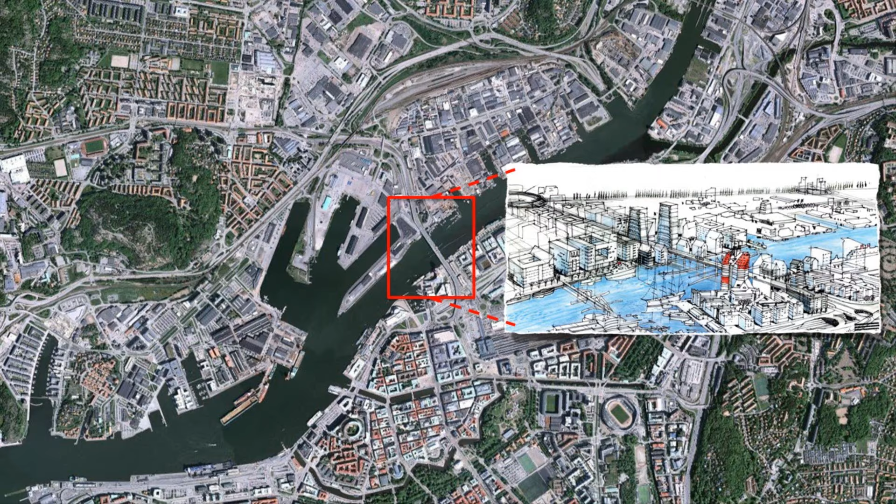CityEngine proved to be a great tool to meet these challenges. Because of the immense impact and 3D nature of inner city planning projects, we felt that we needed a way to communicate these changes with stakeholders, decision makers, and the public.

Another main factor in our decision to pursue a new 3D model for the city was its unifying effect, the ability to coordinate city planning projects between departments internally. We also have many different softwares, both CAD and GIS, being used in planning processes across the city. CityEngine really gave us a platform for bringing this work together, supporting all of these different formats.

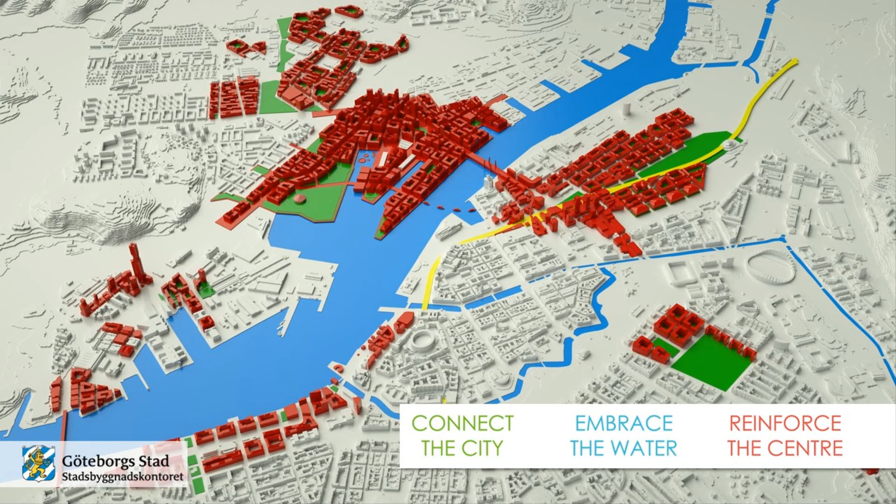Our main goal was first to build an existing conditions model of Gothenburg, then use CityEngine's procedural modeling to quickly model all future plans for the city, starting with the Free Harbor project, in order to review the entire unified vision. Finally, we wanted to share these models internally with different stakeholders and externally to help with public engagement.

Early in its adoption here, we experimented using the Free Harbor project as a pilot. I'll quickly explain our workflow using CityEngine's procedural modeling. We first import our GIS street data, and CityEngine enables modeling networks and lots with parametric rules. These rules have parameters, or commands, that control what type of model is generated.

With rules on the streets and on the lots, a procedural 3D city model is generated, with only your imagination setting the limits of what's actually possible to generate. The rules also enable us to create different real-time reports with vital information during the planning process, like FAR, floor area ratio, or the predicted number of occupants.

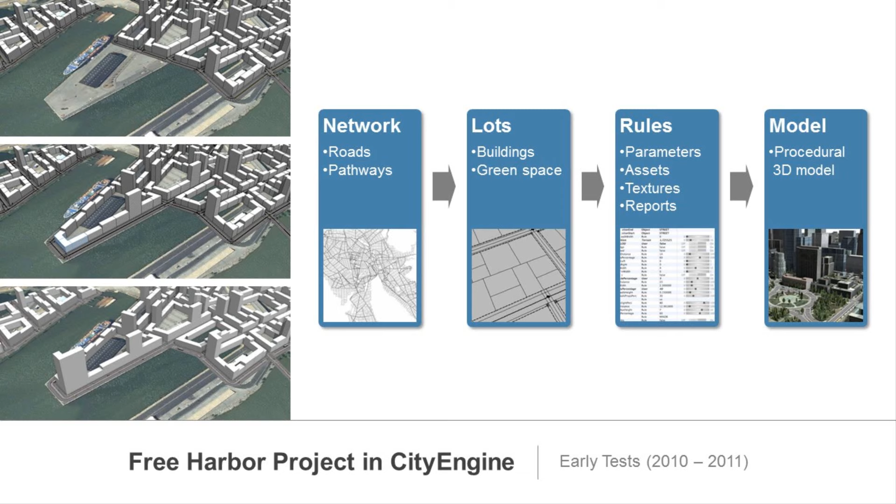First, because of the direct compatibility with GIS, we're able to import all of the networks that make up the roads and pathways in Gothenburg. These are typically represented as a single line in GIS, with some additional information telling us how wide it is, etc. CityEngine actually models out the street and the sidewalks from that single network line.

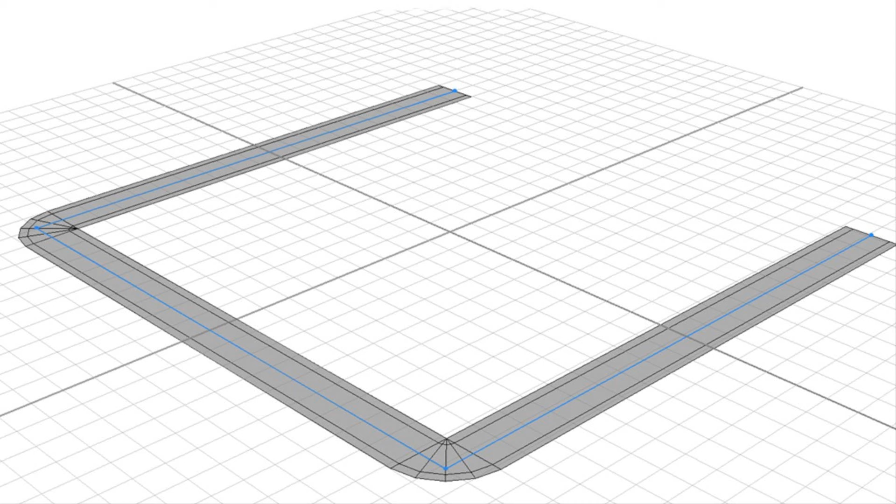We then applied one of the example street rules to these shapes. This extruded sidewalks, scattered objects like street lights, and also textured the street.

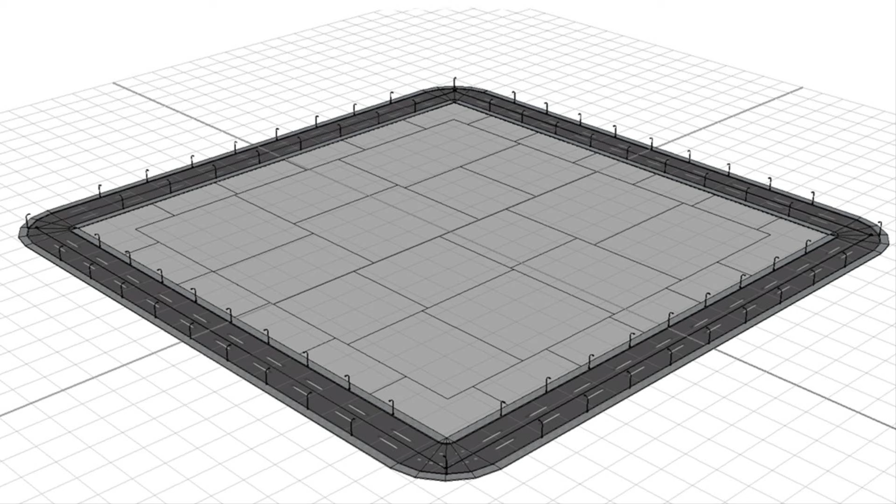A nice feature inside CityEngine is the ability to create blocks when these street networks are completely encircled. We're then able to subdivide these blocks and create lots. This subdivision type, with buildings next to the streets and inner yards, is very common in Gothenburg. After this, we can apply rules to the subdivided lots to generate buildings, like you see here.

With the resulting generated form, it was then important to further refine the parametric rules. Design questions arose, like which attributes would we, the city planners and architects, want to be able to alter, and what type of reporting most matters to planners while modeling building masses?

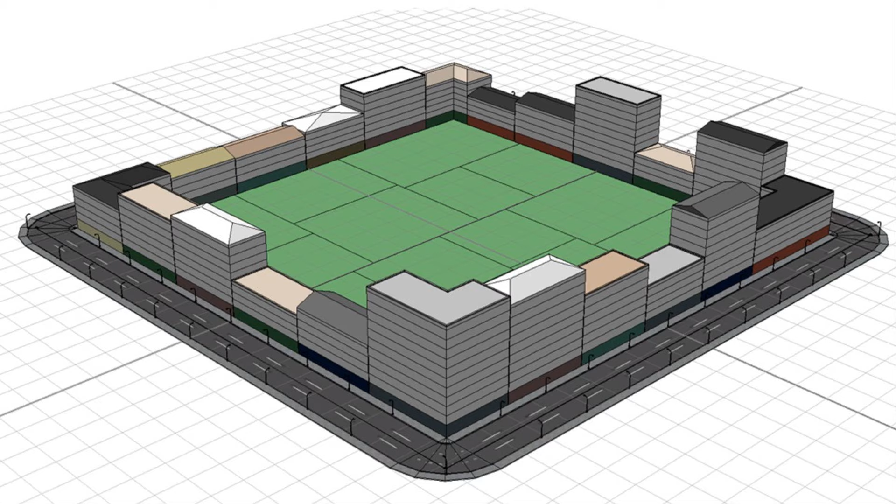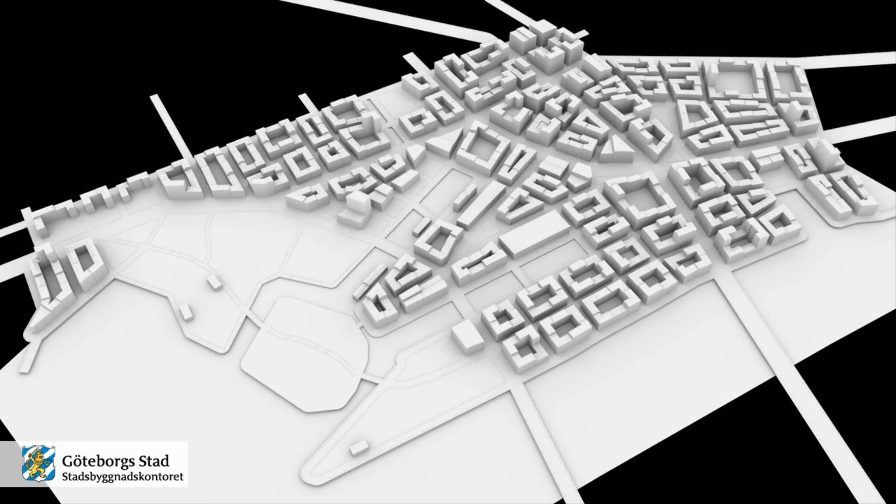This slide shows one of our first visualizations from spring of 2013, showing the volume and scale of the Free Harbor site at, say, the year 2035.

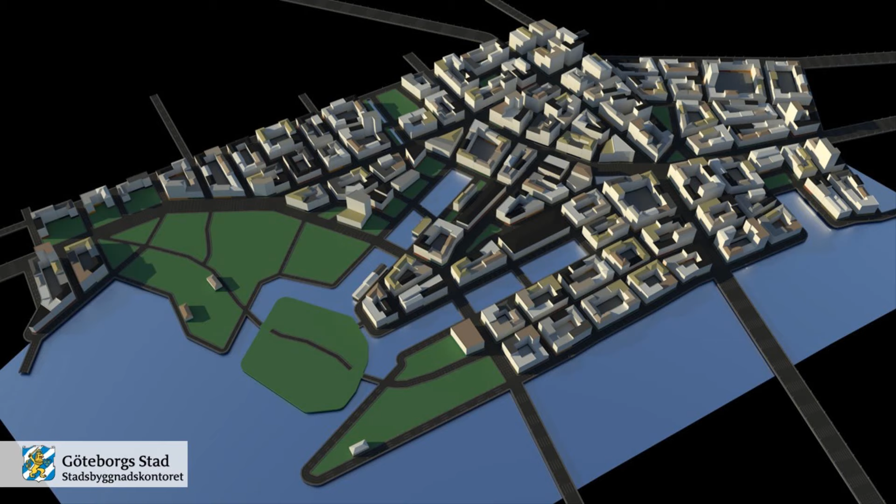With it, we better understand the relationship between the hierarchy of transportation networks and the land use across the project sites. We further compared view sheds and waterfront interface, both very important components in urban design.

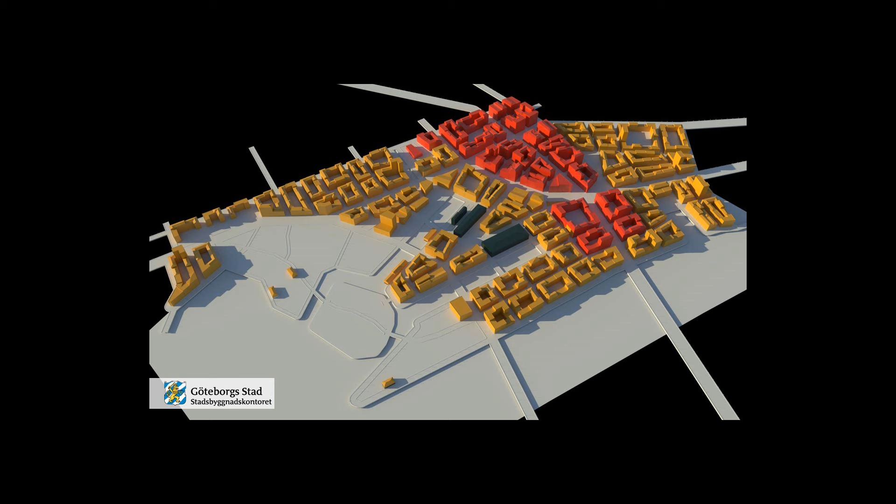For me, the value of this interactive 3D map became clear during our first meetings with the city architects. The 3D model gave us a shared view and understanding of the different project spaces and their context within the larger plan for the city.

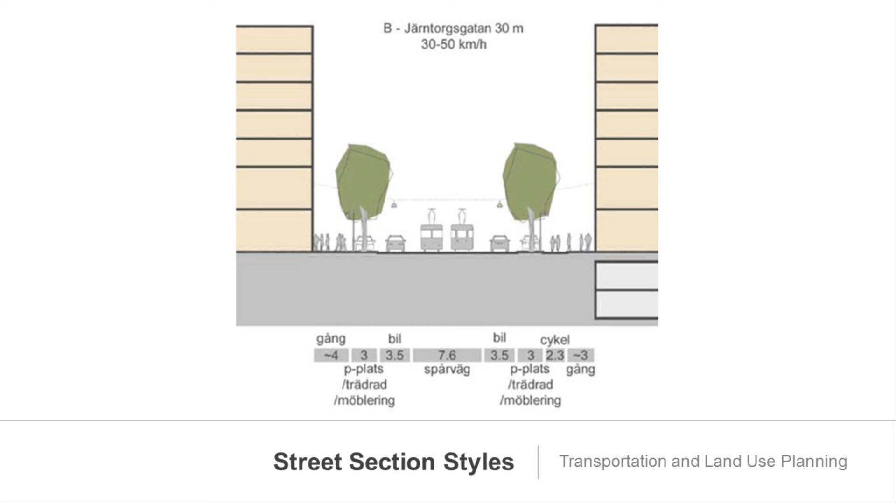The 3D parametric modeling became a powerful tool, much as the 2D section drawing was used traditionally, giving us an understanding of the relationship between the urban corridors and the built land use surrounding. On this slide, you see one of the many street section styles we used in the beginning of the Free Harbor project.

With a project zoomed to each project site, we could virtually place ourselves in the environment that we were depicting in these 2D sections. This is a really powerful feature and often used to create images and animations for our city planners and architects.

A common zoning constraint is floor area ratio, meaning that the mass of a structure can be no more than the mass of a one-story structure covering the entire parcel. Parking and aesthetic requirements limit this type of building, so alternative designs must be evaluated against FAR ratio constraints. Just a simple CGA rule outputs an FAR score for instant feedback on a design's viability.

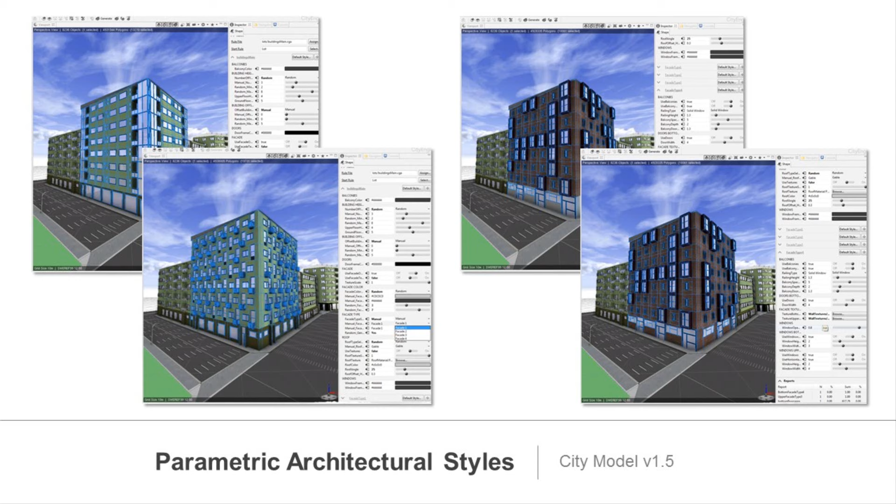Some of the designs you see here are based on recently built lots here in Gothenburg. Our CityEngine model has many different levels of detail, also known as LOD. And this one was to become our highest LOD.

This detail is not to replace the necessity of architects, of course. This type of facade modeling merely allows for more flexible work with the building interface. For example, the number of balconies. Are the balconies recessed or extruded? How do these smaller details affect the appearance within the larger context of the site?

It also shows the scale and the number of generated floors from afar in a more pleasing way. And no other tool really allowed us to experiment at this level of detail at such a large scale, at the city scale before.

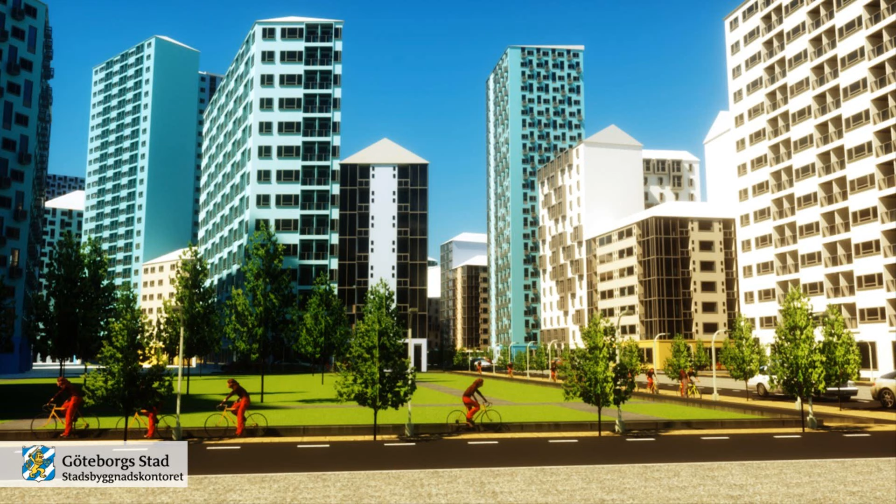These early models convey in a clear and understandable way how the city is looking to grow, both in density and in form. And as we continue to use this technology in our planning practice, we are looking for new ways to leverage CGA scripting to support the evolving planning process.

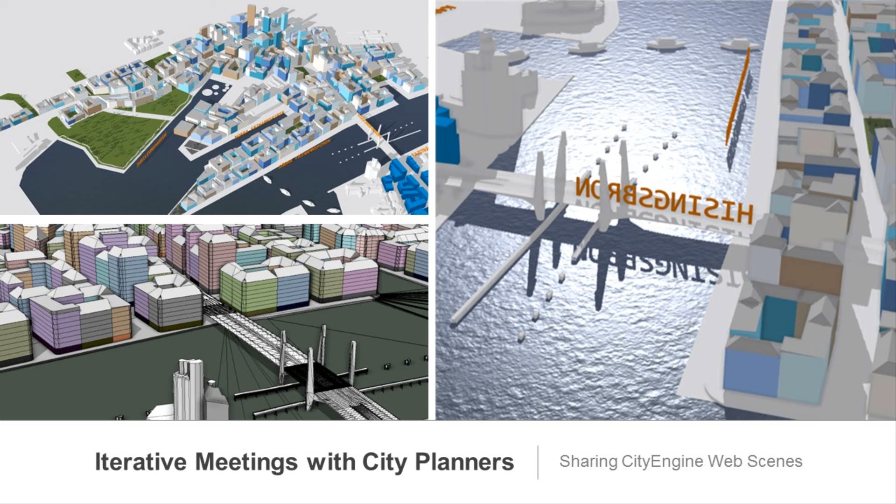Our group now has iterative weekly meetings with the city architects and planners. Traditionally, when a planner or developer looks to build in the city, they create a static rendering or sometimes a video or an animation. We were able to provide them not only the 3D content from our internal charrette, but also an updated web scene to take away.

The CityEngine web scene is an online resource using WebGL, where users can explore the city model in real time in a web browser. They use it for planning, meetings, and for creating pictures for presentations.

With that being said, we could provide them the entire 3D model. But the procedural modeling is very efficient in generating 3D environments to the point that it would and will overload most other 3D softwares.

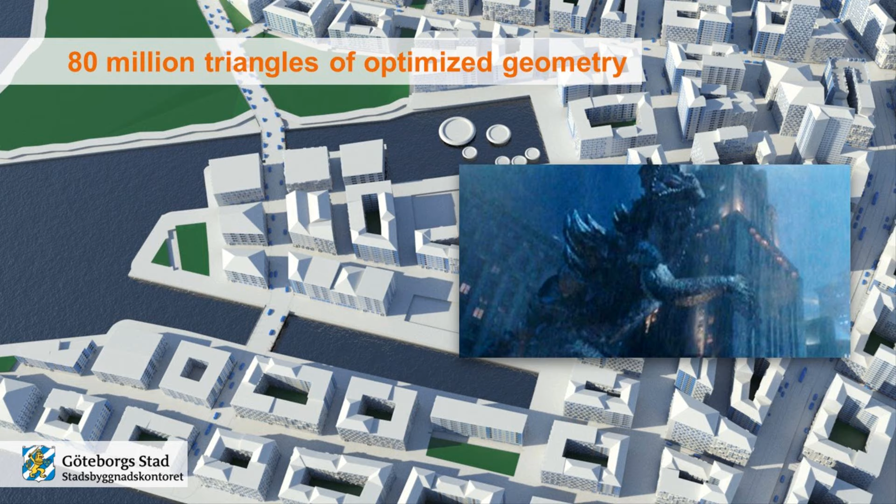Just this Free Harbor site alone, and the model you see here, was 80 million triangles of optimized geometry. Just to give you a sense of scale and size, the 3D model of the Godzilla movie back in the late 90s, which still is my favorite reference, was about 1 million polygons. This means that the Free Harbor site would be about 80 Godzillas.

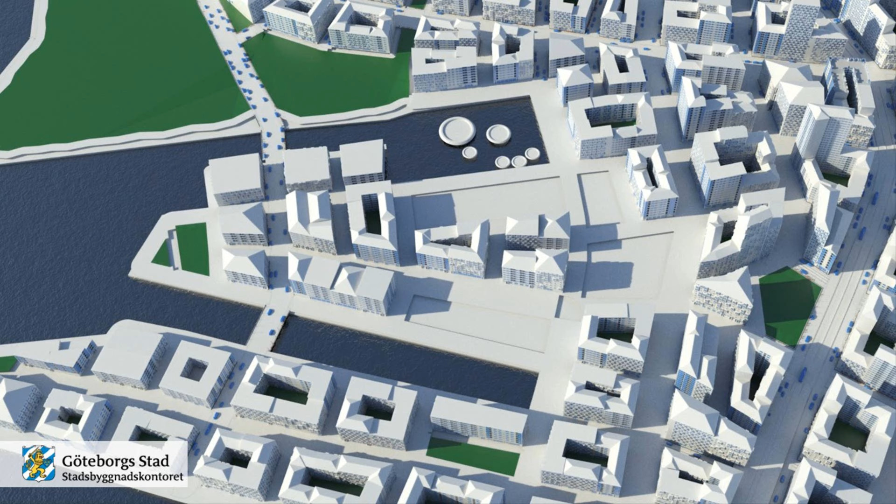We essentially had to split up the entire high-res model even further into smaller quadrants for the city planners and architects to take with them. These models would, however, be old by next week, until the next meeting. But these parametric rules allowed us to keep the entire city model up to date in real time, and to visualize this heavy scene we used Maya and the Arnold renderer.

Our next goal, which was a big one, was to create a 3D printed physical model of Gothenburg using this CityEngine project. It was initially built for the MIPIM real estate show in Cannes, France in 2014, but this model has visited multiple expos since then, and it just came back from Munich, Germany. It actually travels more than I do.

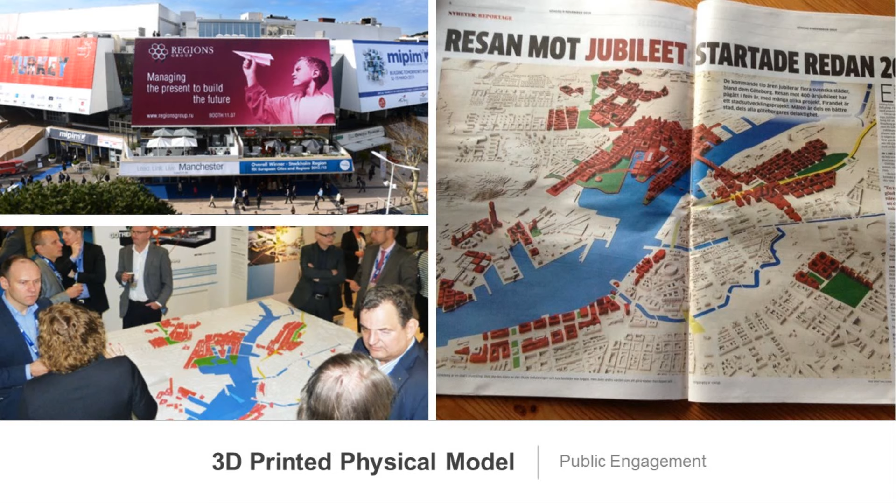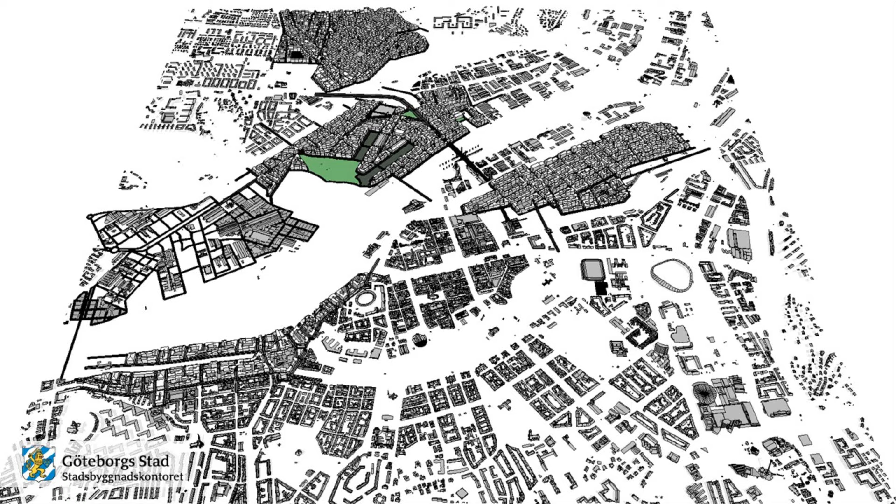Creating this physical model was a huge undertaking. It meant importing all of our roof data for this area of Gothenburg and generating three-dimensional buildings, and also generating a large and heavy terrace-like ground model suitable for 3D printing. These enormous tasks were given to and delivered by my colleague, Tobias Wikström.

To make a long story short, after a few months of hard work, the 2x2 meter model was finally complete. The red and green parts here were created with CityEngine, and the larger white areas were generated from our GIS data of Gothenburg.

It was built modular for transport purposes, and here's a work in progress shot before all the 64 tiles were generated and delivered. The heaviest tile weighed around 3 kilograms or 6 pounds. As we produce our second, third, and fourth edition, next time perhaps we will print the terrain separate to the buildings. This would allow us to better switch out new updates to the plan.

Another common output for our CityEngine model is the Urban Explorer table, where city planners and architects often gather and have meetings and discuss plans and concepts. It's an interactive real-time visualization system, and perhaps the most used end product for our CityEngine model.

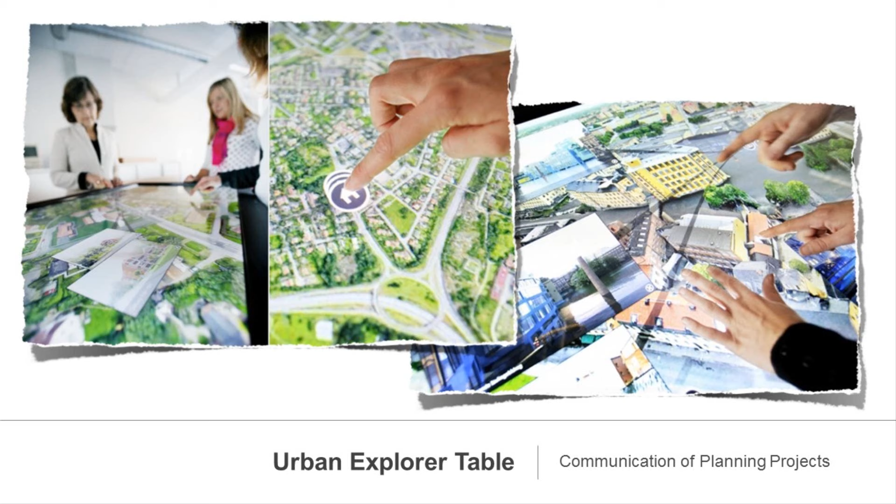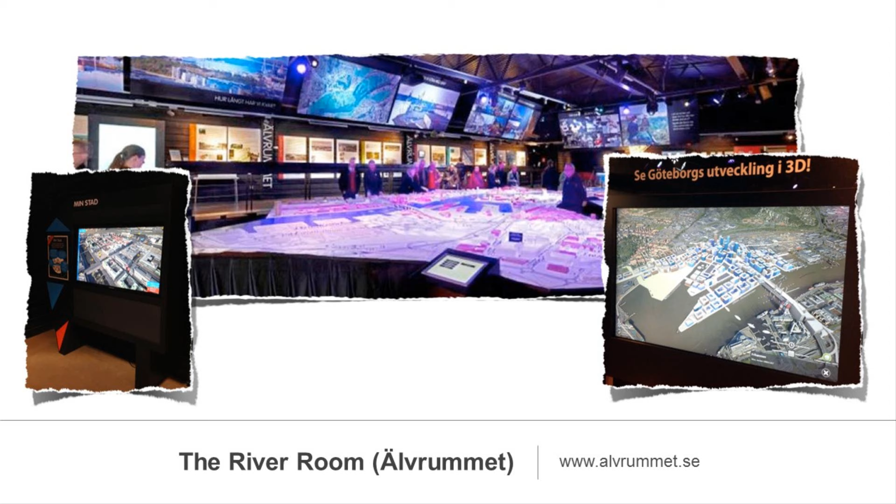Our main place for public outreach in Gothenburg is the River Room, or Älvrummet in Swedish. Here we have a 12-meter wooden model of the city showing new projects, and also other interactive touchscreen products featuring our CityEngine models.

We refer to our in-house production pipeline as virtual city planning. In summary, this enables our department to visualize and present city projects in an easy way, present complicated projects in a non-complicated way, create decision support material for politicians, easily test planning concepts in real time during meetings, quickly identify problems and stop impossible scenarios, and create models which have multiple end products.

We also use this pipeline when planning the big Gothenburg 400-year anniversary in 2021, where our CityEngine model will be used for multiple products.

In closing, what we found is that virtual city planning leads to a common view of the projects, shorter, more efficient meetings, better communication and coordination between departments, and that it's easier and more intuitive to communicate city planning to the public.

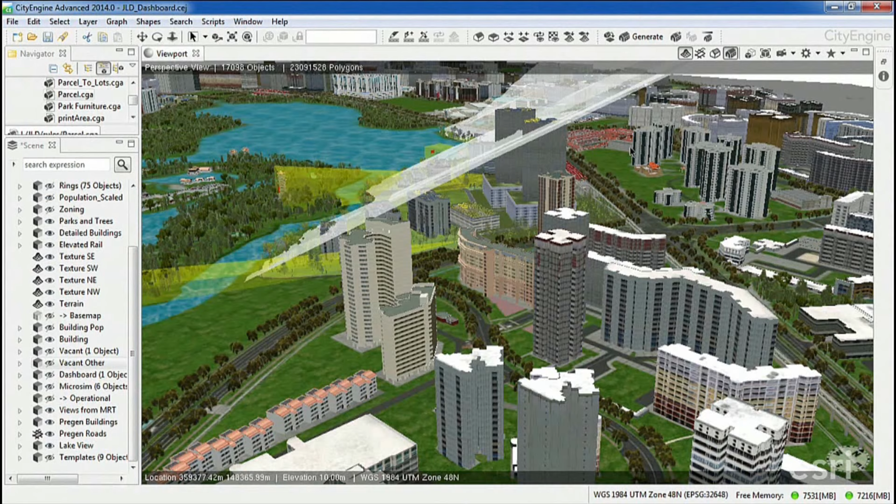They recognize the future comprehensive plan will be data hungry. So how do we start to visualize this data? Furthermore, how do we start to work with this data, with environmental and economic constraints? You can see here that the URA was able to implement CityEngine rule-driven modeling within their planned constraints, like this lakeside view shed. The buildings are able to adapt on the fly, enabling a flexible 3D design environment.

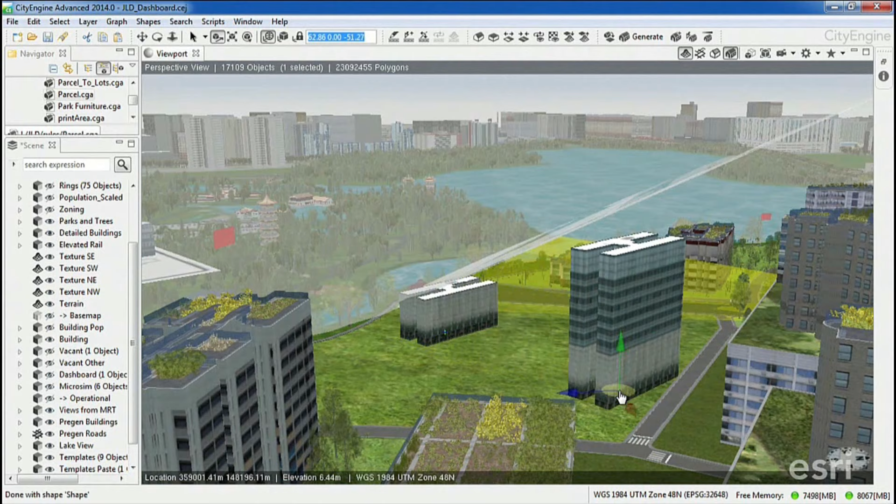Another great example comes to us from Rochester, New York. The city's goal was to achieve a shared and common 3D view of their city to support their planning process. This is a great example using CityEngine for comprehensive planning and to support the development review process. The city worked closely with Esri's partner Bergmann Associates to implement their 3D vision.

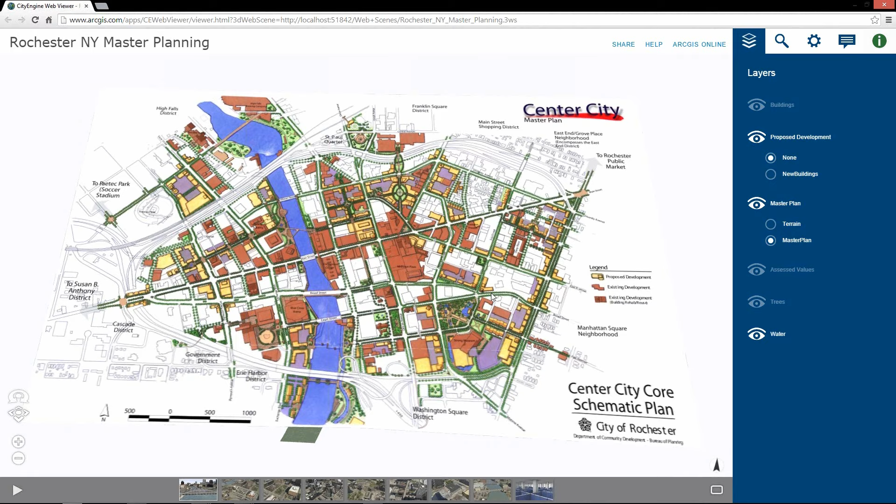Rather than show you a PowerPoint slide, I'll open up one of their web scenes. This is the web interface that Arvid was referring to, which the City of Gothenburg is also using. The City of Rochester is overlaying their master plan design, their 2D master plan, on the terrain of the city. Let's dip in here, and I'll turn on the 3D content.

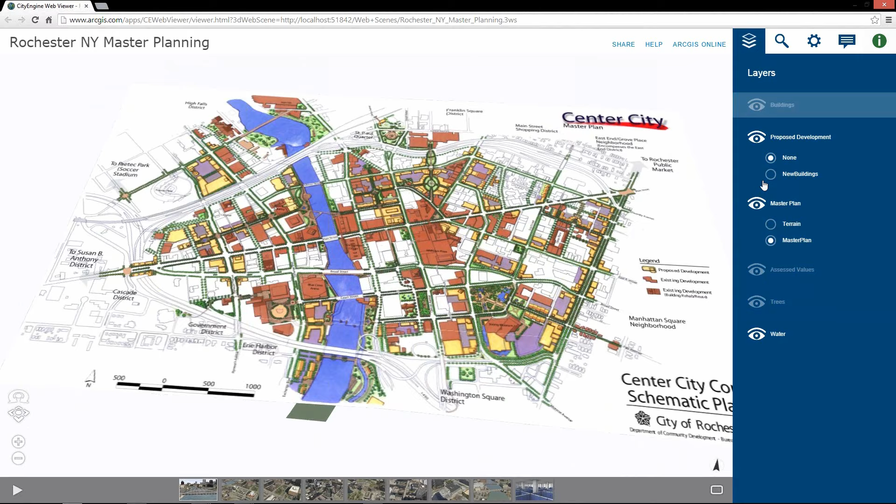This gives a very effective way of projecting the 3D model on the wall without the need for a high-powered desktop at planning and stakeholder meetings. Very rapidly, you could bring someone to a specific location within the city and really have a conversation about that location. As I mentioned, they overlaid the master plan, which represents the future growth for the City of Rochester.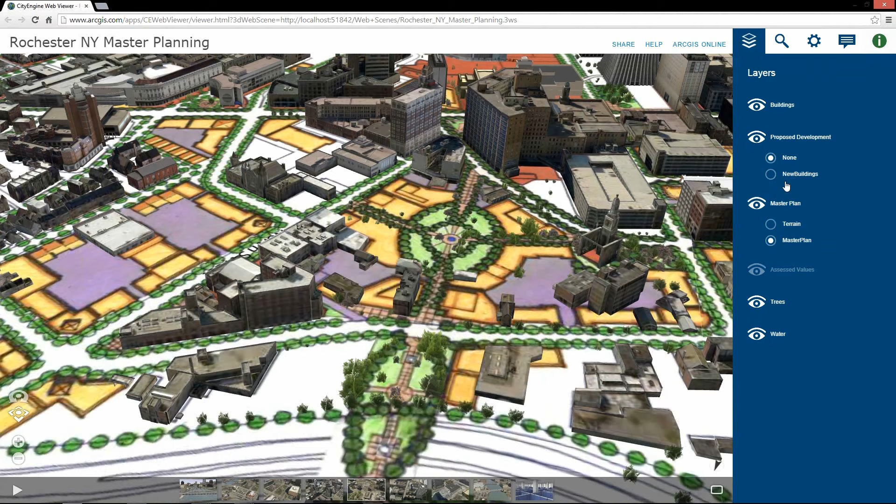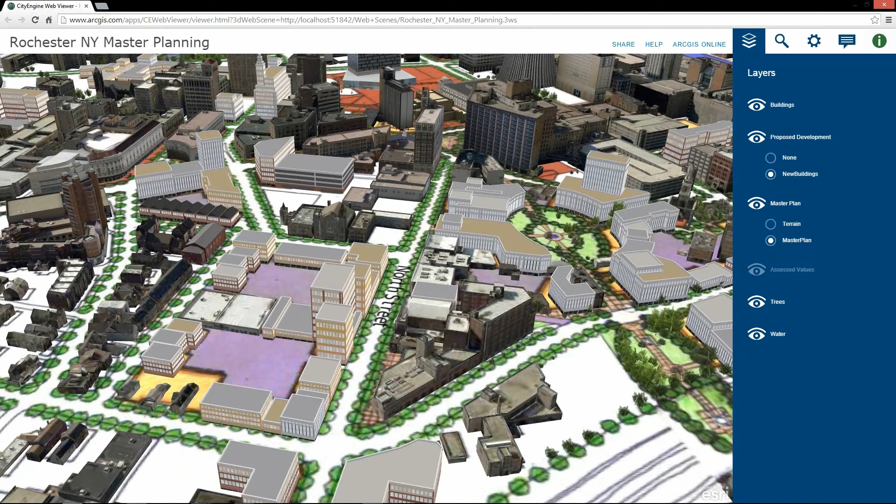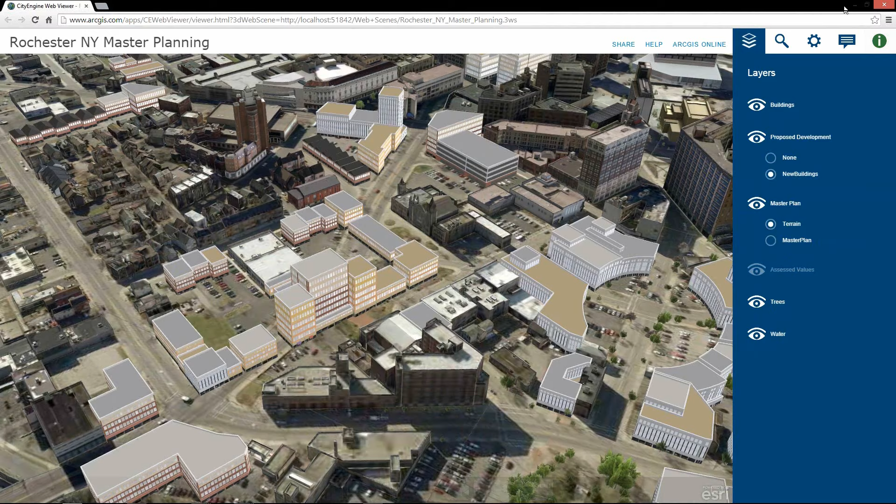Using CityEngine rules, they were able to use the footprints and generate buildings based on their form-based code within the city, looking at height and the different glass interfaces of the buildings. You can also do comparisons. All these layers can be set up within the CityEngine project ahead of time, and you can have a swipe between the before and after. A very powerful tool — it really liberates 3D modeling from the desktop computer like never before.

Moving now over to the California coast, nearby me, we can find a great example coming from nearby San Francisco. The Bay Area Rapid Transit, or BART, was looking for a way to communicate transit-oriented development plans both internally and out to the public. BART also recognized the efficiency and impact that can be achieved by communicating their plans in 3D.

BART is working with Esri Professional Services to define their 3D modeling process using the Richmond station as a prototype. This project laid the groundwork for how BART is going to move forward with modeling all 44 of their stations in 3D to better communicate the development plans for the areas surrounding each station.

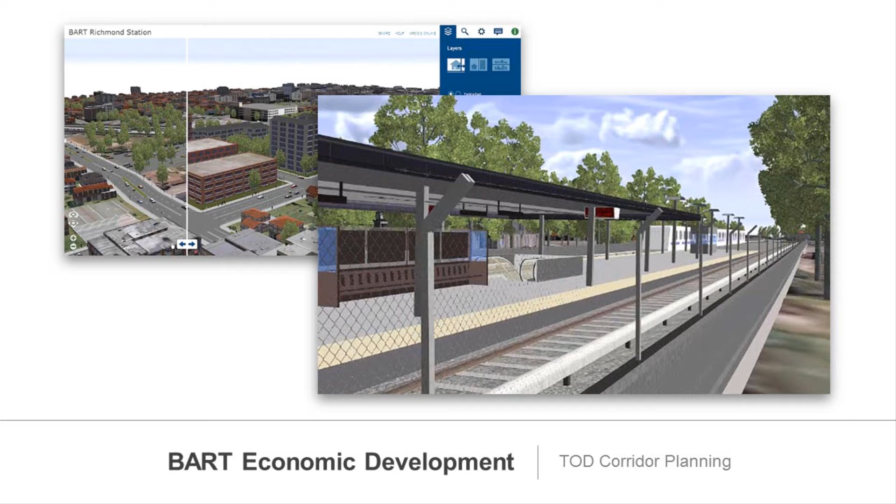Our second speaker today is coming to us from Garsdale Design Limited, located in the UK. Matt is an architect by training, and before Garsdale Design, he worked for the Esri R&D Center in Zurich, where CityEngine is developed and got its start. Over to you, Matt.

Thanks, Brooks. I hope everybody can hear me. Hi, I'm Matt Bueller. I'm currently the head of 3D technology here at the UK-based Garsdale Design. My background is in architecture, but since university I've been getting more and more specialized in 3D graphics and visualization. Having worked in the CityEngine development team in Zurich made me one of the very few CityEngine specialists worldwide. My specialty is high-end graphics and digital sets, and I hope we here at Garsdale Design will soon also provide services for the VFX industry.

Today I'm giving a brief overview of the most interesting key points of the Favela project I did in CityEngine with my friend Cyril as a hobby project. In a minute we'll have a look at a few of the images we produced, and if you haven't seen the video yet, just search YouTube for the keywords CityEngine and Favela.

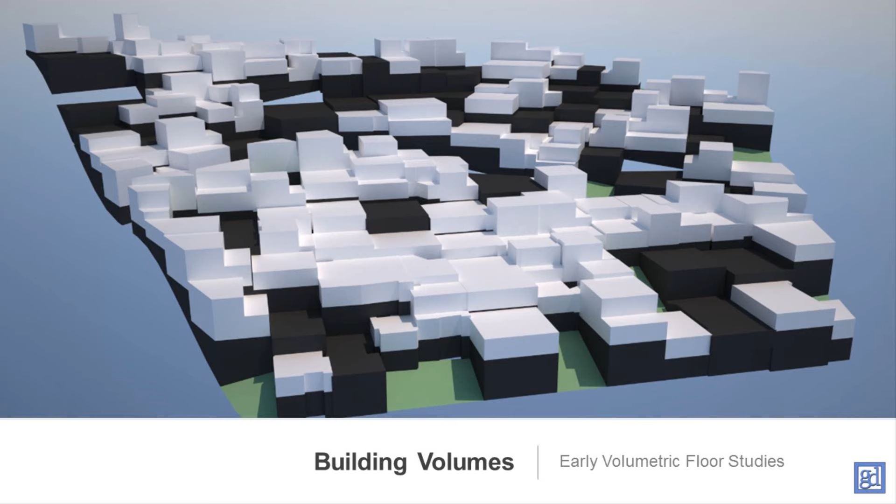So where did I start? Of course, with tests about floors and mass distribution in CityEngine.

As we've seen in Arvid's presentation, CityEngine is a procedural modeling application. The definition of how a building is modeled is done in CGA, CityEngine's proprietary scripting language. Some of the first tests I did was to find the best approach to model building volumes that look feasible for the given scenario. This image shows a very early volumetric study.

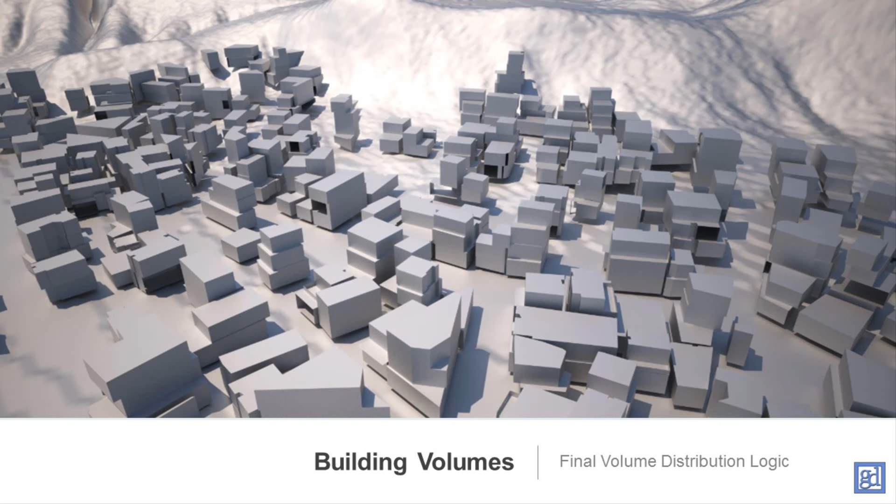White volumes have a flat bottom side, while black ones have a sloped bottom side. This picture shows some of the final building volumes. As you can notice, the building volumes are very irregular, with dents and shifting relative to each other. There's even some missing walls, exactly as in a real favela.

Next topic, facades. We collected 60 facade images and processed them each in CityEngine's Facade Wizard. The result was a structured library of facade rules that can adapt to all possible given facade geometries, given by the mass model we've just seen before. I manually post-processed each rule to minimize texture repetition and further marked specific polygons as either opaque wall or window, to be able to distribute more objects like pipes and ACs on the facades.

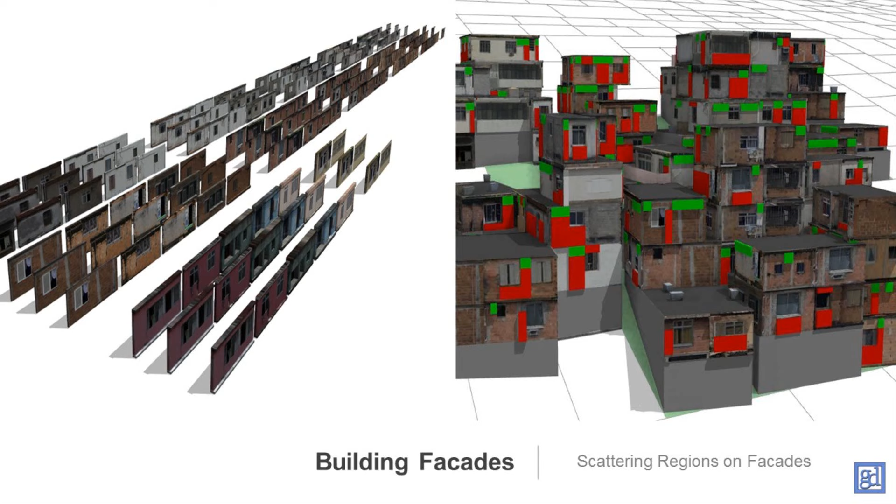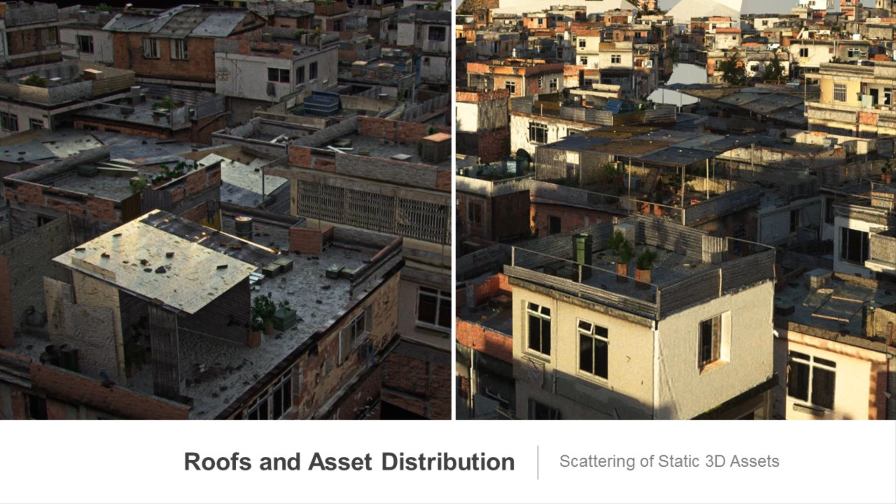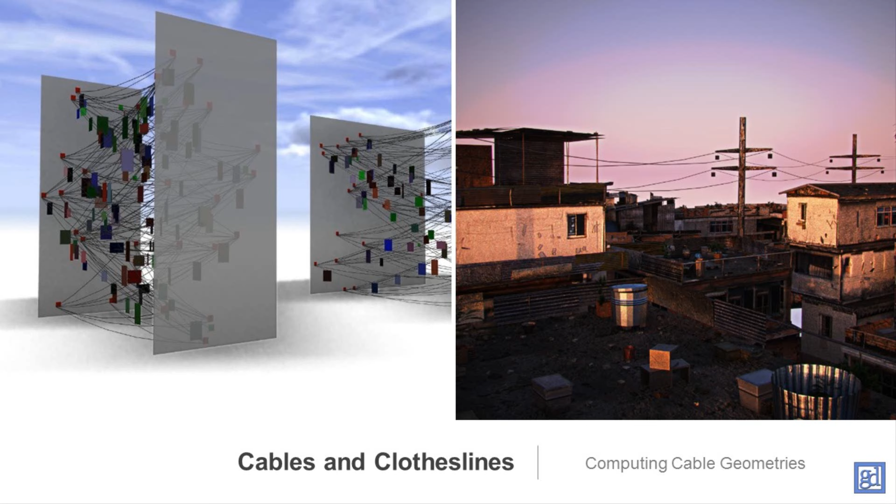Since no favela is convincing without cables or clotheslines, but cables can sadly not really be created procedurally in CGA, I created a Python script that does this for me. Using CityEngine's reporting functionality, I can collect all potential cable connection points, evaluate them, compute the catenary curves, and finally create the cable geometries. The result is quite convincing, where cables go from building to building and connect to the next suitable power line pole.

Last but not least, I want to quickly explain the pipeline I designed to go from the model in CityEngine, with a simplified material representation to save resources, to start the render in final quality in Maya in less than 1 minute, at least for small bits of the favela. This was needed so we could have fast design iterations with full artistic control over the project, without having to worry about the quality or the amount of detail in the final model.

Developing this pipeline took me about two-thirds of my whole project time, but it also taught me the most. So this is the chart of the pipeline, let's quickly explain it.

Working in CityEngine and wanting to start renderings in Maxwell Render from within Maya, I had to bring over two types of data from CityEngine: the model geometry and the reported point locations for each of the plant species. The file format I settled on to export the models was OBJ, since it proved to be the most flexible. It's a text-based format which allowed me to parse the whole file with code and restructure the data.

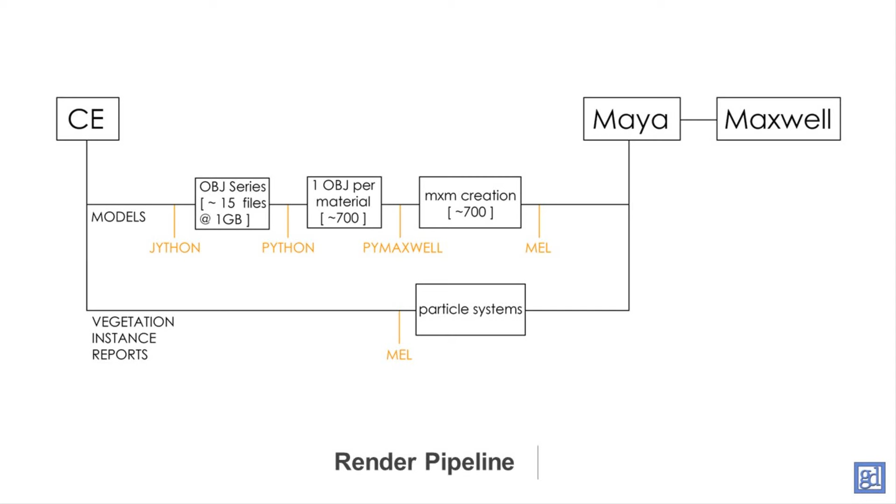To bring over the vegetation instancing data, I used CityEngine's console to directly print out Mel code, which, when copy and pasted and run in Maya, created a separate particle system for each plant species and filled them with the appropriate particle positions.

So this was it for the Favela project, and just to have a quick overview of what we do here at Garsdale Design Limited: we have an older, traditional branch of business which includes architectural, planning, urban design and heritage services.

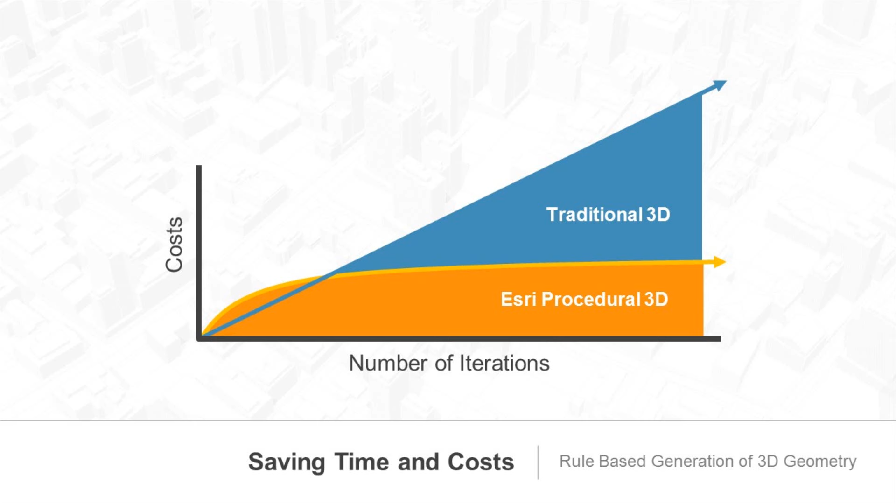So the big question is, is efficiency critical to your 3D pipeline? When you compare Esri's procedural 3D to traditional modeling in 3ds or SketchUp, you can see that if many iterations are needed, it's much more efficient to use a rule-based parametric modeling software, particularly with large models requiring high detail. With traditional 3D modeling, it's pretty much equal output to equal input, and ultimately it's about saving costs. To do some of the work we've seen here today, you might need a fairly large team working in 3ds or SketchUp to accomplish the same tasks.

In summary, procedural modeling can be explained in 3 steps. First, bring in your geometry, either GIS or CAD. When using GIS, we can take full advantage of the shape data or attributes to further automate the modeling. Then you apply a rule. This is the combination of existing 3D models, like all of the AC units and pipes that Matt was showing, and textures, together with a simple scripted framework called CGA, which stands for Computer-Generated Architecture. These resulting generated models can get iteratively more complex, from a basic form to something that better resembles the Parthenon in complexity.

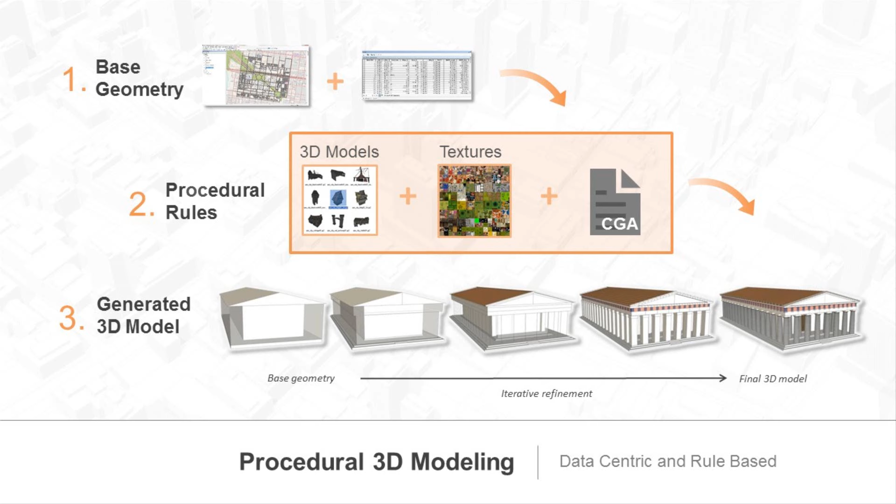These rules make it possible and easy to describe an urban environment by using a set of density and performance metrics. These metrics can be used both to describe as well as prescribe different urban interventions. This is really what sets CityEngine apart from other parametric tools like Grasshopper or Houdini.

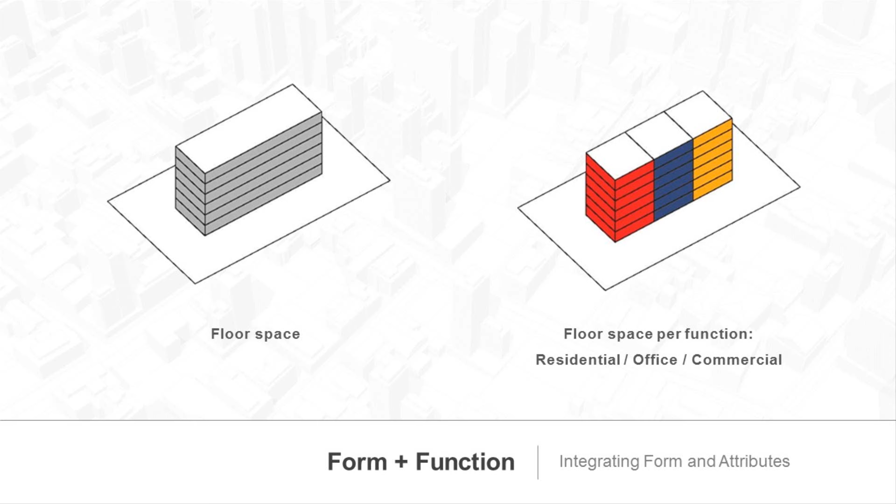CityEngine offers a flexible 3D design environment supporting many industry standard 2D and 3D formats on both import and export. CityEngine also provides multiple views of the same data, so you can take these new buildings and change the 3D view from the rendered look to a theme showing building use by floor, or even rainwater infiltration rates in blue across the entire 3D model. This really enables different actors in the design and planning process to relate different programmatic demands to different spatial solutions.

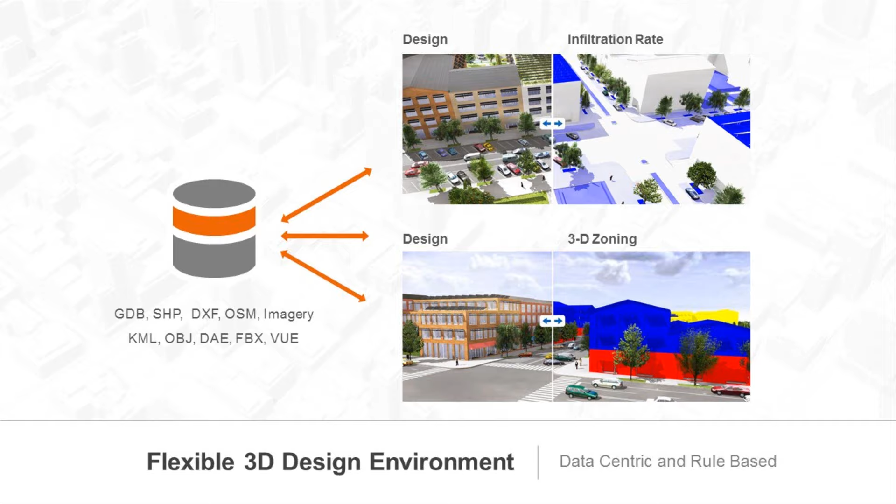So allow me to take you now inside of CityEngine and show you how easy it is to create a design proposal and leverage some of these multiple views.

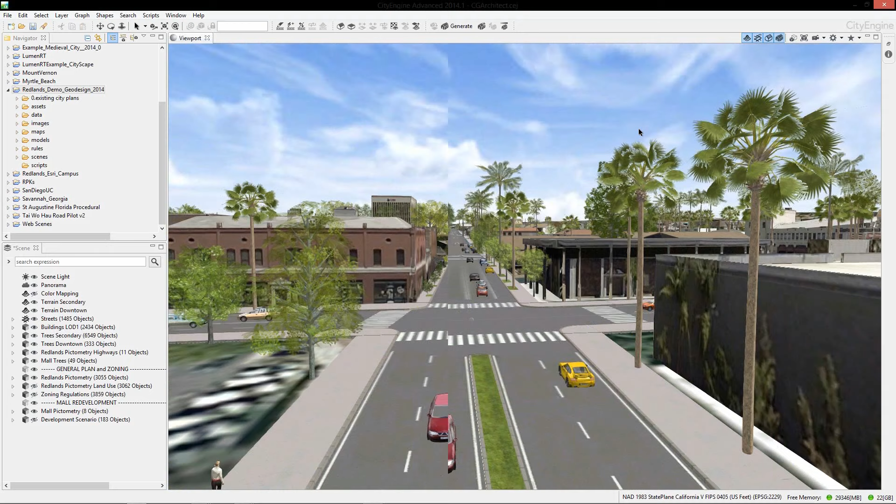So let me go ahead and take you to any town, anywhere. CityEngine allows us to bring in existing city GIS data, like tree points and street networks that you see here, and completely model the city as it exists in 3D. Highly realistic building models can also be brought in from Revit as IFC or OBJ, or from a vendor like Pictometry. We can use the parameters within the rules to make proposals, like how this street might look with bike lanes, etc. In most other applications, you might just have a snapshot, a pretty picture of the model, but we can actually take all kinds of useful information, like zoning and land use regulations, out of 2D and drape them onto the 3D city model.

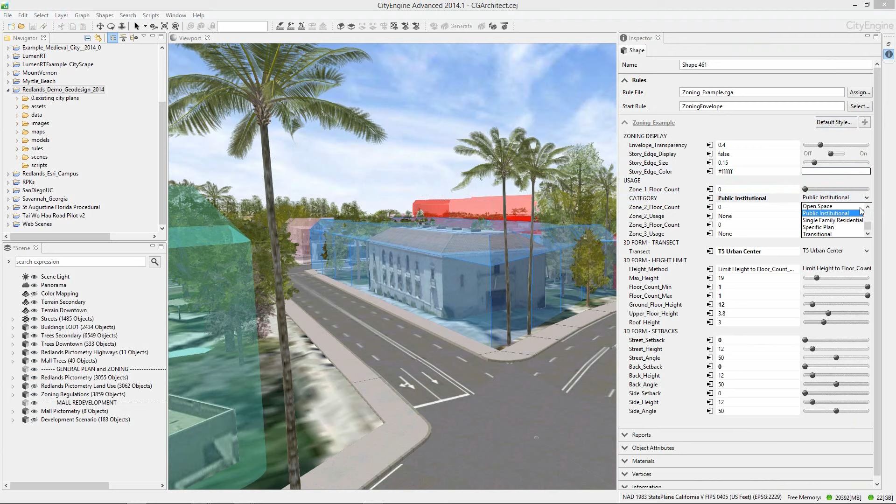Many of you might have seen zoning signs, for instance, that notify the public of a new zone change or a new business. The first question is, what's the current zoning of the property? Plus, what's the zoning around it? We can see this property here is zoned for public institutional use, and we can easily propose a zone change. So we can actually change this to commercial use and even change the maximum floor height, using these procedural rules.

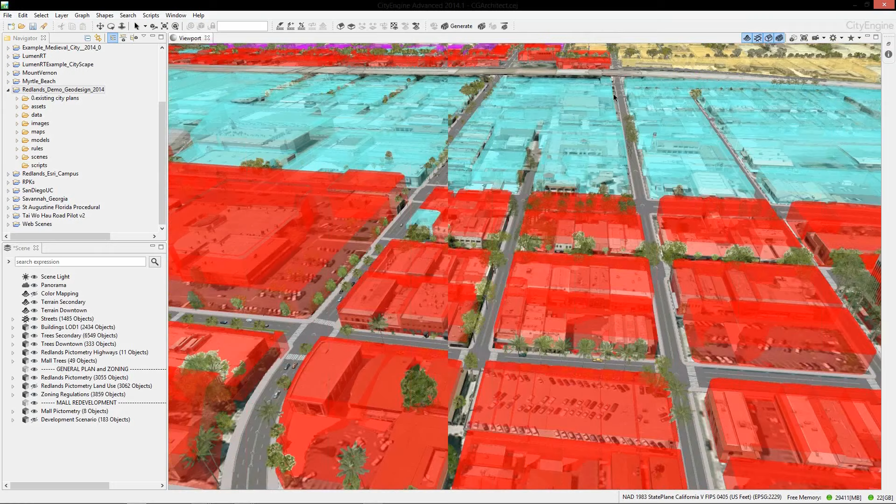And it's really not only about zoning changes. It's also about evaluating the current city's conditions. So if we navigate over here to the downtown bank building, we can see if there's an exception or a violation. This building's height has obviously exceeded its zone height, but knowing it's the tallest building in the city, they probably had an exception.

So let's go ahead and take a look at one particular project here using CityEngine. In this case, we're interested in the redevelopment of this mall, a major economic challenge facing many towns, at least here in America. And we can start to experiment and experience what it could become. So what could this look like? Let's go ahead and redesign it.

The first thing we'll want to do is go ahead and turn off the mall. I've already put it on a separate layer. And using the street creation tools, actually continue Main Street through the site. You can see as I draw a new street, it's actually inheriting the style of the street I drew from. We'll go ahead and add one more street, and we'll go ahead and delete this segment to leave room for a park.

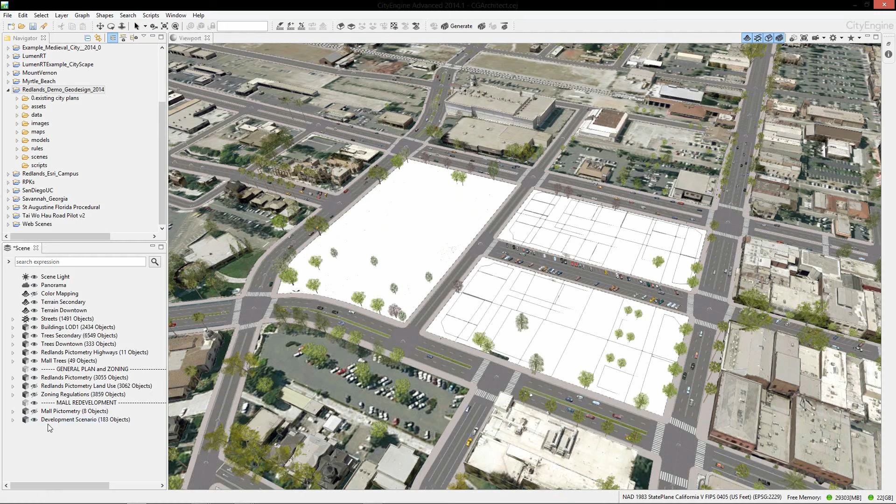We can import CAD or GIS data, or even draw our development plans right here using the sketching tools in CityEngine. Once we bring in that data, we apply a rule and then actually generate the 3D content. So let's go ahead and dip in here.

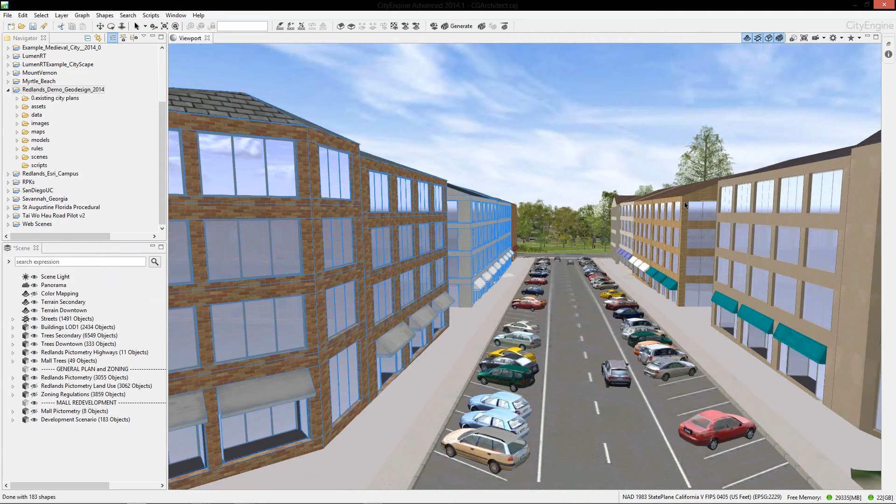We can really gauge the design within the larger context of the city to better experience how it looks and feels here. And like I was saying, CityEngine provides multiple views of the same data. So I can select these buildings and change the 3D view from the rendered look to a theme that shows usage by floor, and I can actually strip away all the textures as well.

So we can further refine our design. Let's add a couple more floors—we'll bump it up to 6 floors. We can actually add these floors, and it's not just in the model.

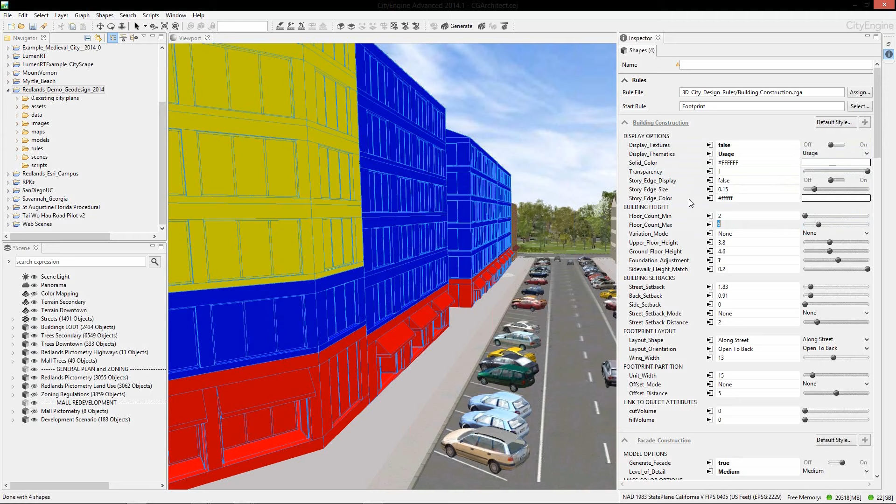We're actually getting real-time reports as well, that Arvid had mentioned. So what the rule is doing is, as we change parameters, it's reporting out different metrics. Some example consumption variables here are based on a baseline and a coefficient based on the land use, but also the FAR, the floor area ratio, or the gross floor area that Arvid was referring to. So it's real-time feedback as you model.

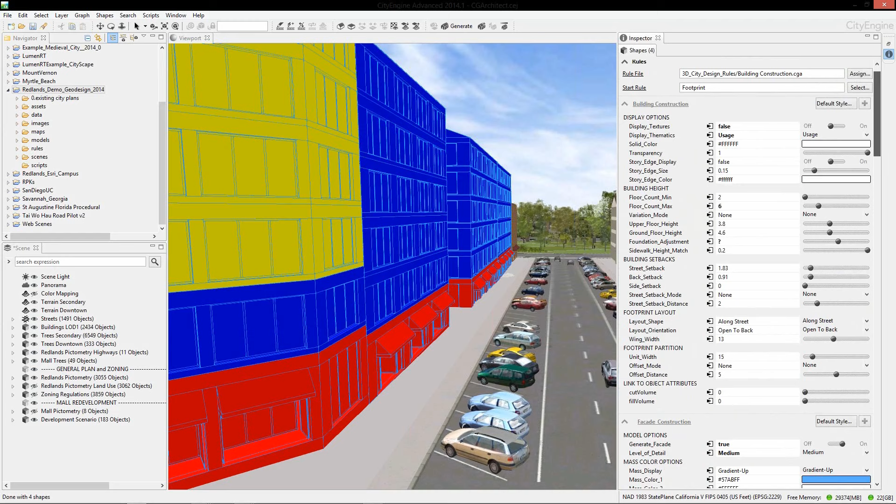So let's go ahead and suggest some tree plantings on this street. It's a little bare. We can actually manipulate the sidewalks here, make them a little bit larger. And using a parameter for the street, we can put the tree percentage at 100%.

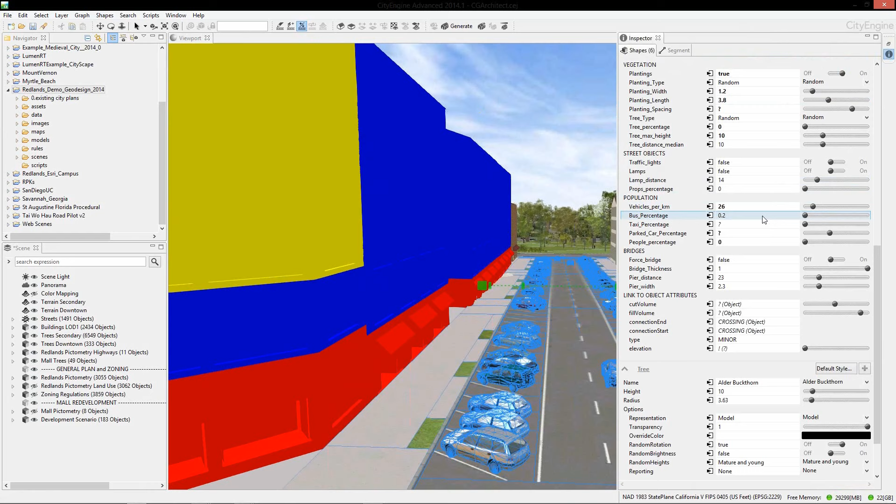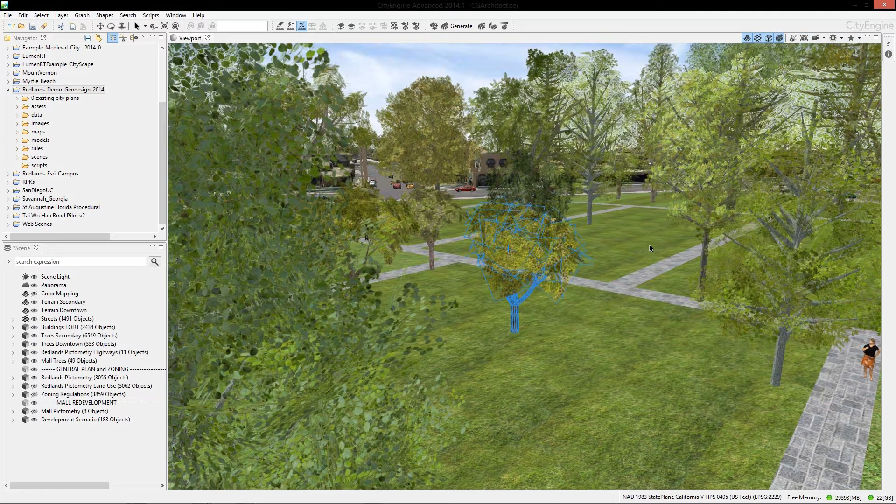And we're using some models for our trees. Let's zoom over here to the park. As we navigate over, you'll notice the very realistic trees that we have here. This park represents most of our tree library, so you get a pretty good idea of how many trees we can work with. These trees came from a partner of ours, e-on software.

We worked with them to create this initial library of genus and species specific plants. These trees can be scattered on polygons, distributed on points like you see here, and they also have 3 different representations.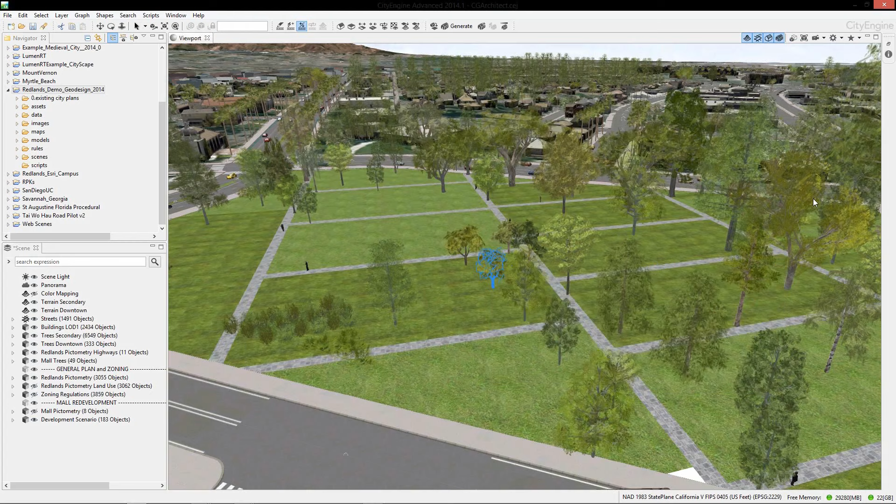So let's select these trees in the park. Much like the buildings, we can switch the view of these trees to something like an analytical view, which in the GIS analysis world is great for communicating the tree canopy and running a shadow analysis on.

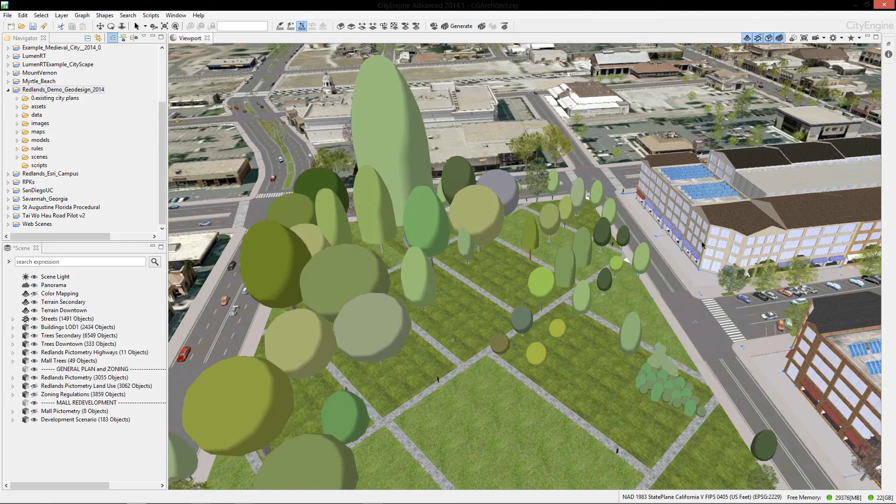So we've talked about some of the major themes around procedural modeling and 3D GIS. I now want to focus on how 3D is integrated into the actual product, supporting the enterprise, connecting multiple communities across this platform.

The Esri platform supports BIM, and there are 3 main methods for integrating this highly detailed data into your project. First, direct import from Revit models into CityEngine via Collada or OBJ. These can be rendered with applied textures through a rule.

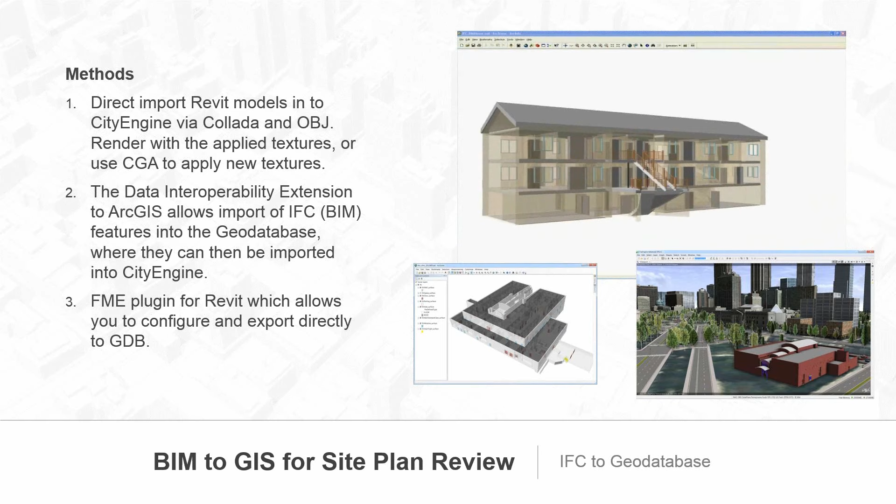Second, the data interoperability extension to ArcGIS, our core GIS platform here at Esri. This allows the import of IFC formats into GeoDatabase, where it can then be imported into CityEngine. And finally, the FME plugin for Revit, which allows you to configure and export only what you need—that's very important—directly to a GeoDatabase on export from Revit.

CityEngine rules can also be shared as a rule package, or RPK, for use within Esri's core ArcGIS software, but also in Unity and Maya with our CityEngine SDK. These RPKs basically package up the 3D models, textures, and script for sharing.

To learn a little bit more about that CityEngine SDK, just visit our GitHub location. The SDK is out there to enable third-party applications and to better integrate within custom pipelines.

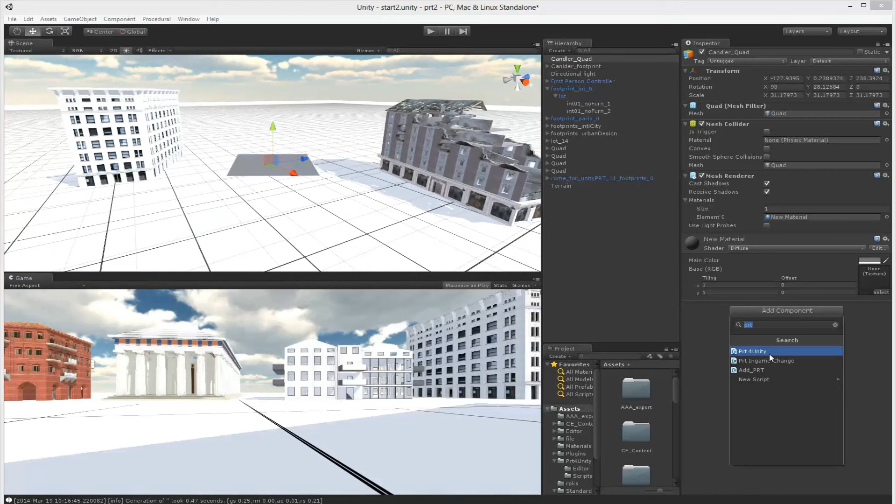So for all of the Unity users out there attending today, there's actually a great example plugin available which allows you to add the plugin as a component. Then you browse for your rule, and you have those attributes that can be changed—those parameters—that can be altered right in Unity, and you hit generate.

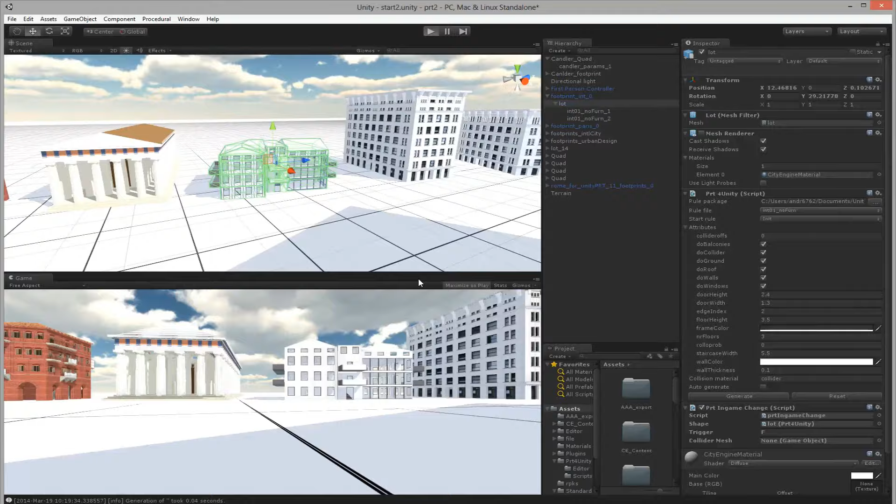We really see this type of close integration as the golden key for 3D workflows in the future. And just imagine designing within real-time environments, really virtually placing yourself on ground level, even navigating inside the building, for instance.

With new advances in technology, there are new advances in expectations. As game engine technology gains adoption and advances in real time allow for faster rendering, we have to keep in mind the technology that is also working hard to increase the polygon count and detail ultimately attainable in 3D. So how is this detail ultimately going to be served?

Allow me a minute to discuss Esri's vision for the future of 3D. With our software, we can effectively make more out of 3D than a simple visual. We've seen powerful work done in CityEngine, giving us fast, powerful tools that support your current workflows and transform the way you model in 3D. We're bringing this same modeling power to Esri's latest addition to the desktop GIS series, ArcGIS Pro.

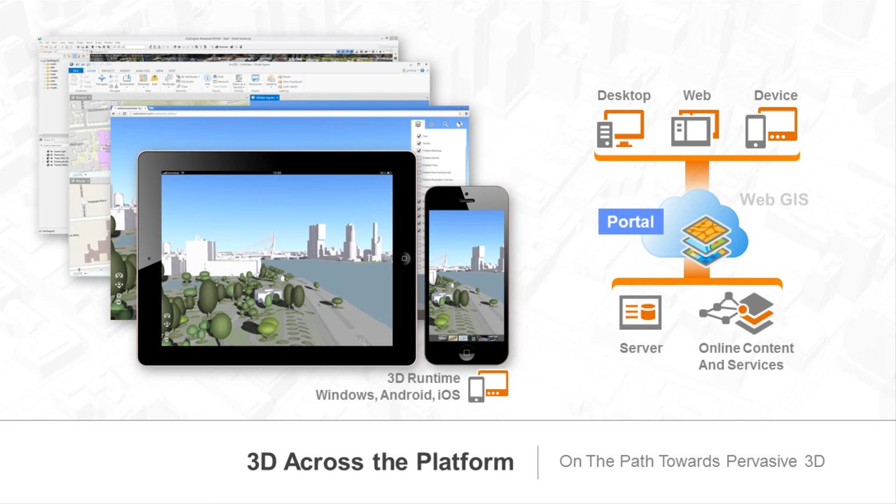However, there's also a demand to make 3D work more available across web browsers in the form of web scenes and mobile devices through 3D-enabled applications, and then full circle back into desktop applications. So next year, look forward to these new 3D services that will enable the next generation of app development.

In the past, creating a 3D cityscape was an expensive and manual process. Probably the reason why most of you guys answered no on that poll earlier. And as a city grows and changes, these hand-built models are quickly out of date. We see that clients will come to expect real-time 3D feedback, this loop of 3D modeling to support a charrette-style design process. We can now rapidly accelerate the modeling process altogether and make use of 3D content like never before.

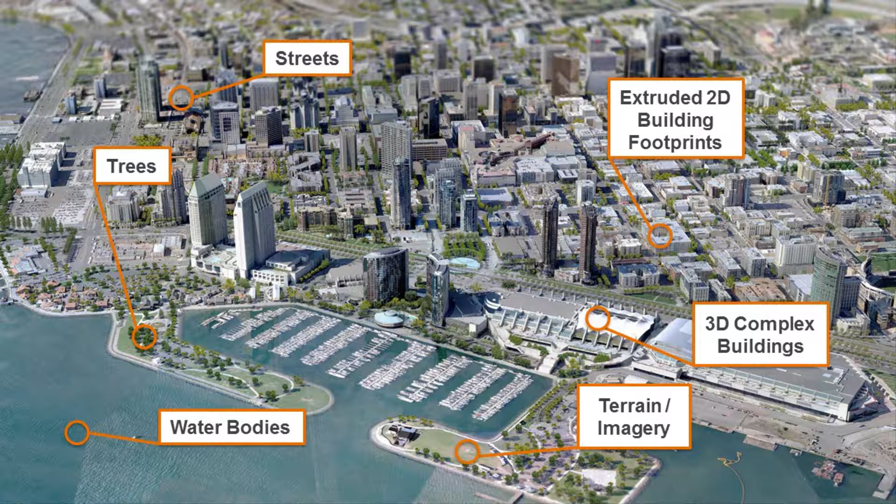It really comes down to having an overall strategy for bringing the features of CityEngine, like you've seen here today, to your organization's pipeline. This happens in 3 distinct steps. Step 1 is to secure a pilot, evaluate the data you have. Second, building this into a manageable, shareable 3D city model, a base scene. And finally, it's important to have a clear use case in mind.

This isn't just about seeing in 3D. This is GIS, 3D GIS. It's about understanding. And once these parametric rules are created, it's possible to further leverage them within many different projects, really streamlining your 3D pipeline.

So with that being said, I'd like to take a moment and hear once again from our attendees. Let me launch one more quick poll. Do you have to model a 3D city soon? Take a moment to respond. I'm sure you can see how procedural modeling gives you a number of different ways to further leverage content in this regard. All right, thanks.

We do have 30% of us saying yes, you will have to model a 3D city soon.